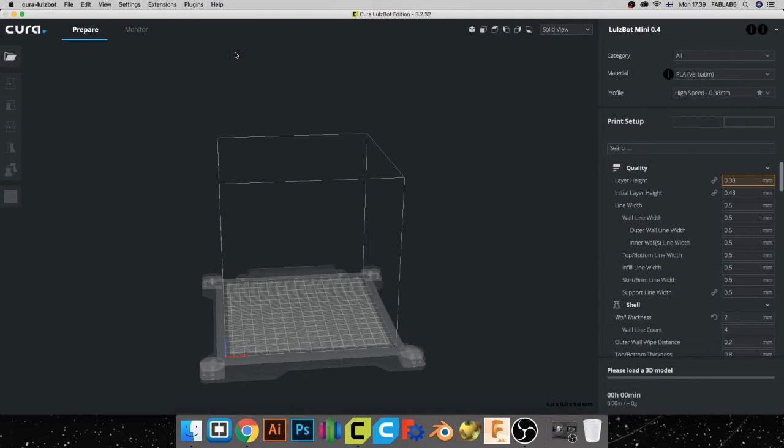And then you can load your files. So you go to File, Open Files, and you go to Desktop, Parametric Balljoint, like so. Can we do one print at a time? We can, but then you have to export them separately.

So okay, now we have a file where these two parts are not connected. So I'm going to clear this, and go to File, Open Files again. This time I'm just going to choose this one. Okay, so here we go.

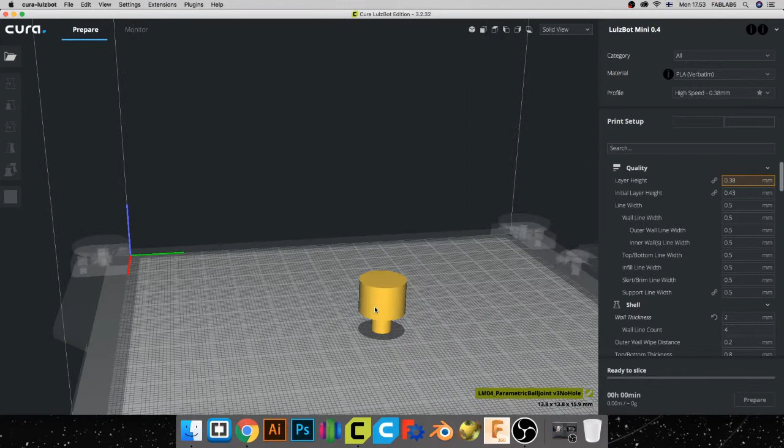So what we would like to probably do is avoid supports. In order to avoid them completely, if you print it from the other side, then you would not need the supports. You won't need it.

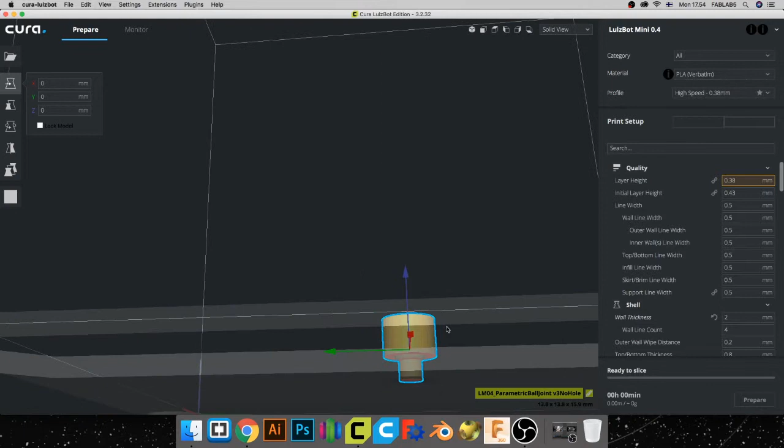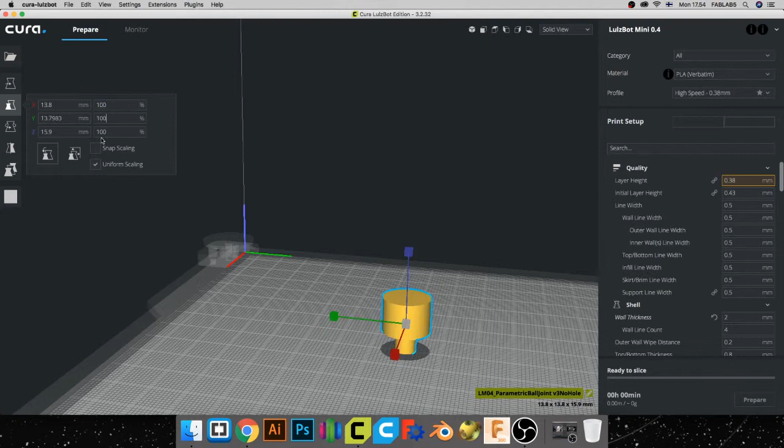So here in Cura you can do all kinds of modifications. If you want to tweak it — let's say you print something and it shrinks, and you want to try to scale it up in a proportional way, you can do it here. You can specify percent and all of that. And in this case we need to rotate, so you can do that as well.

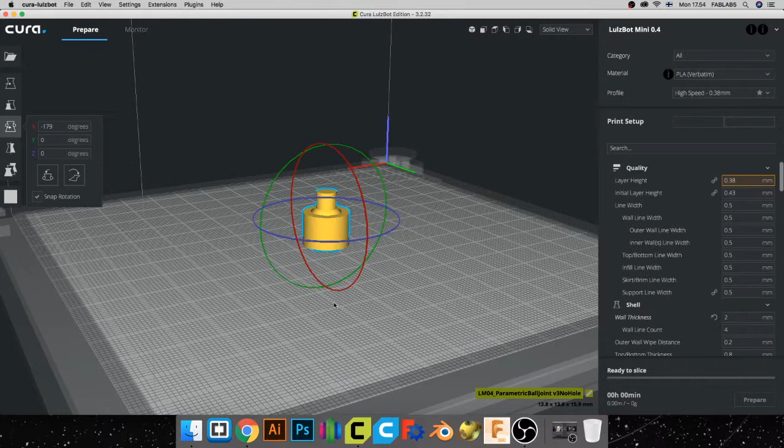But I mean, we can rotate it 180. No, according to the instructions, that's going to fit the ball. Ah, okay, so the midpoint has to be at the top, which is why it's down here. Okay, then it makes sense.

Okay, then we'll probably make supports on the bottom. So, just in case you need to do something with the model, you can use these tools on the left in order to do that.

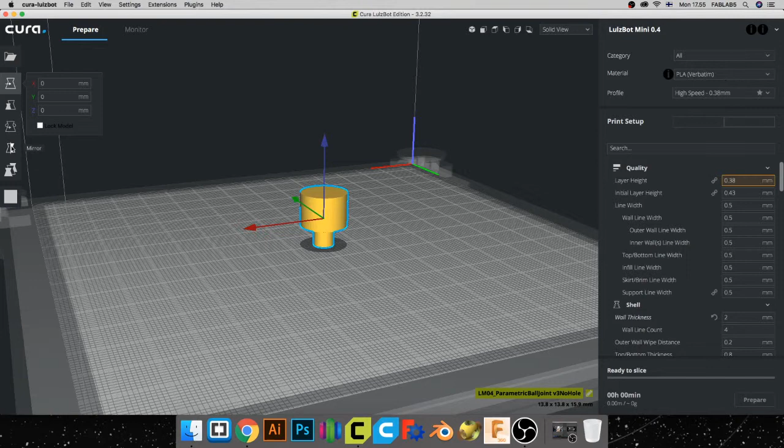Then sometimes you might also need to multiply the selected model. Let's say that we want to create 2 copies of it — it's going to create those and automatically also align them. But in this case, we just need 1 for testing. It's usually also a better idea to print just one object to test your settings and the model, than to print 10 of the same kind at the same time.

First of all, you don't know whether it's going to work if you're doing it the first time, and second, it's going to take a lot of time — and the longer it takes, the more possibilities for it to fail.

Here we basically just need a few settings, but I'm going to leave this all anyway. For material, select PLA — pretty much any PLA setting is going to work because PLA is PLA. Then we can select the profile, and I would recommend going with standard, and it works really 90% of the cases. I haven't measured it really in percent, but in 90% of cases this is really what you need, and it's also going to make it so that your print is less likely to fail.

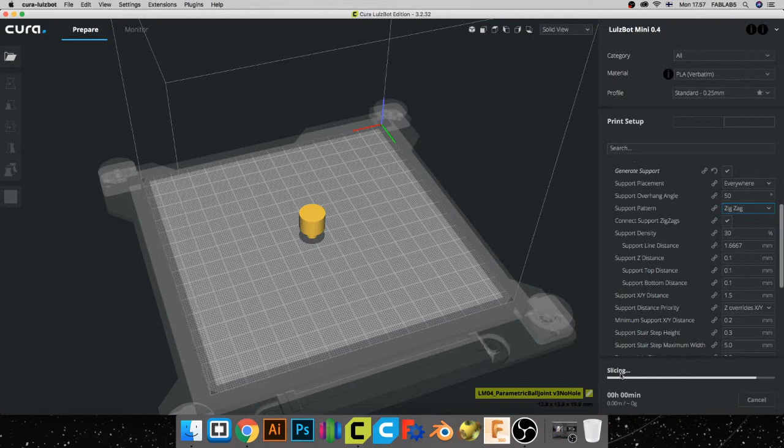Before saving it, we can go to layer view over here to check how it is going to print. So we can zoom in here. Yeah, so it looks okay.

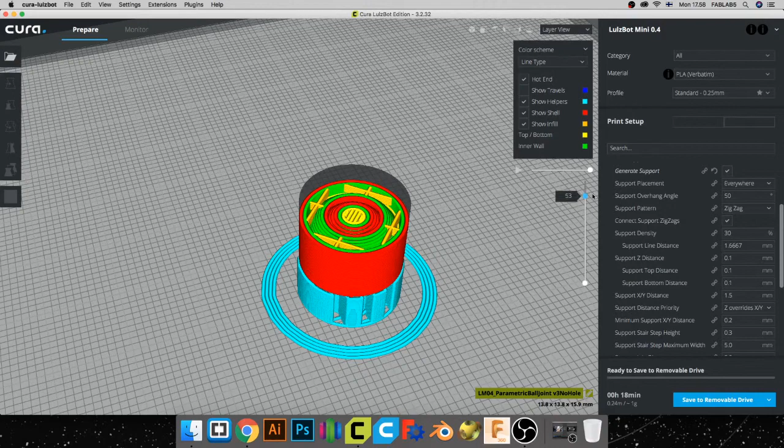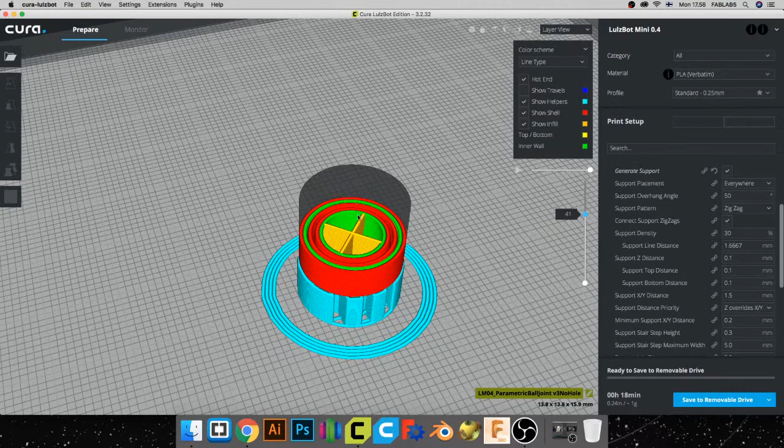Whoop. Moved it. Okay, let's prepare it one more time.

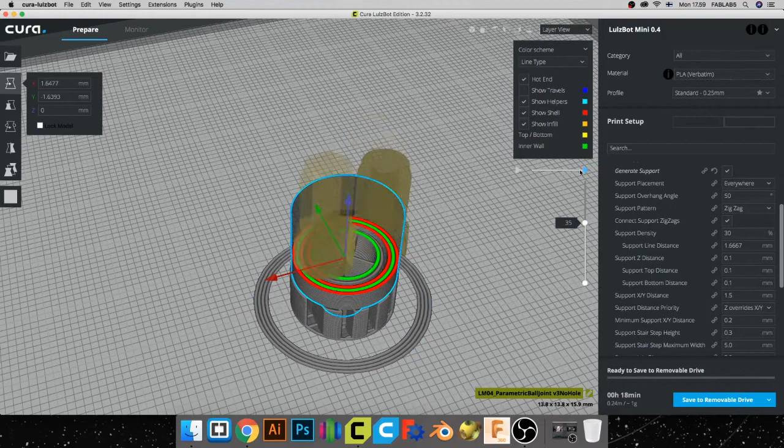So here you can go to any of the layers, and with this slider you can see how each of these individual layers is going to be printed.

And then from here you would save to file, so select the save to file option and then click save to file, and let's create a new folder, and let's save it here.

So it's gonna save it automatically with the LM04 prefix, which is the LulzBot Mini 0.4. It's gonna automatically generate a prefix from this title, just so you know which printer should be used for printing this file. And it's gonna save it as G-code.

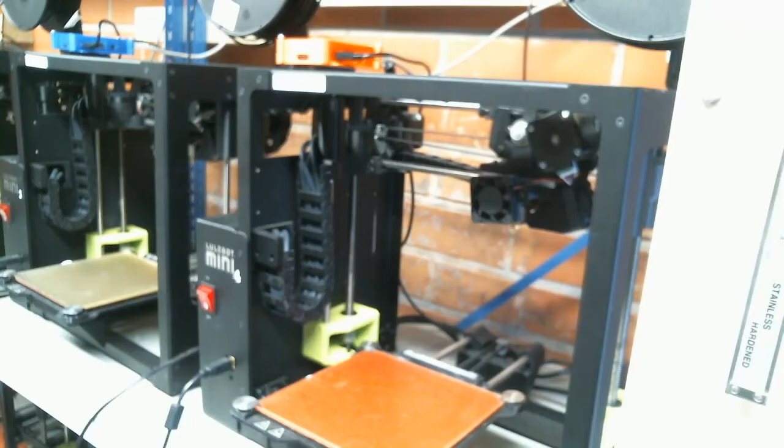Save. So there's a Raspberry Pi here, serving a web interface. This Raspberry Pi is in between your browser, which we're going to use to access the printer, and the printer. The printer is connected to the box, to the Raspberry Pi, with a USB cable, and in order for the Raspberry Pi to access the printer, we need to switch the printer on, obviously.

Now it's on, and so when it's on, we can open the browser, and usually you have these links here in the bookmark bar. Basically what you need to use is the 3D printers link, which is going to bring you to the fablab.aalto.fi/3D printers page, and this works only locally.

So when the printers are not accessible, these little circles are red, and you need to know the number of the printer. In this case, it's the LulzBot Mini 4. Then you can click on it, and it's going to try to automatically log you in. If not, try to use the presets over here, and if you don't know the password, or if it doesn't automatically fill in the password here at the lab, ask someone around, they should know it.

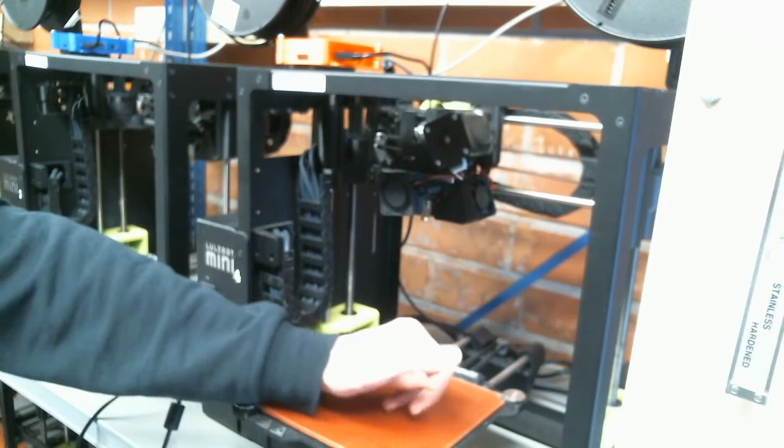The printer is going to start to move. First it's going to heat up the nozzle to 140 degrees in order to clean it and wipe it. You see on the back side of the printer there's this felt thing, and in a few seconds you'll see what it's going to do with it.

I think it actually does two functions with this. First, it cleans the nozzle from any leftover plastic. Second, it's trying to figure out the transformation matrix that has to be applied on top of every line of G-code, so to level it out better.

So now it's going to wait until it heats up to 200 degrees and start printing.

It's always a good idea to watch until it finishes the first layer, to make sure it's okay. Usually if the first layer is fine, the rest of the print is also fine.

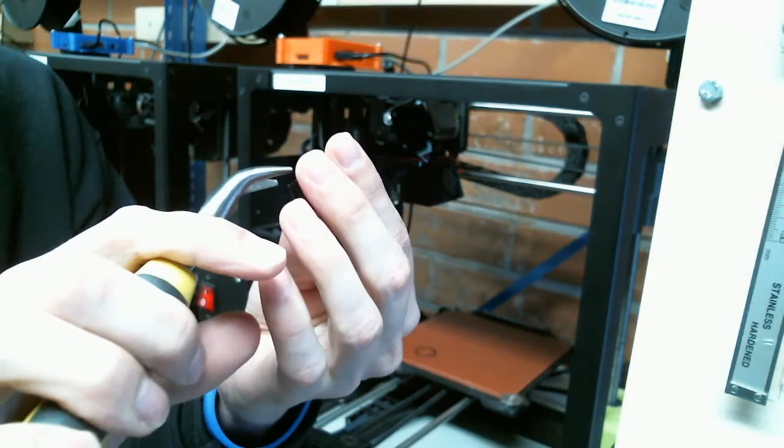But if it doesn't come off so easily, then use smaller pliers like these. Let's see... yeah, okay, so here, that was easy.

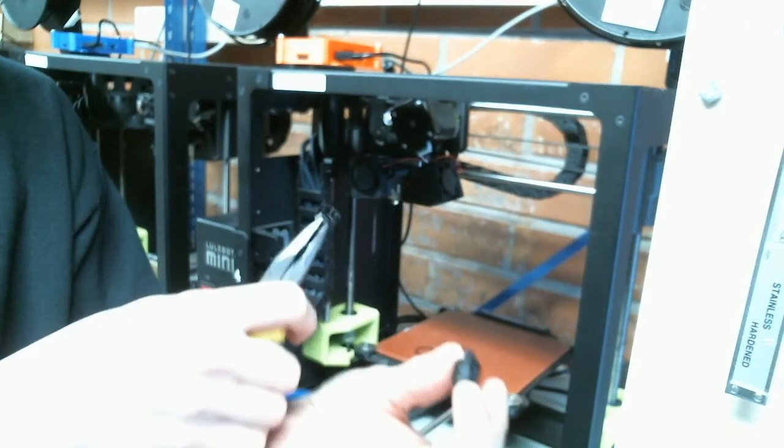And then you probably want to see whether this is going to move or not, right? Yeah, and it does. Oh, that's nice.

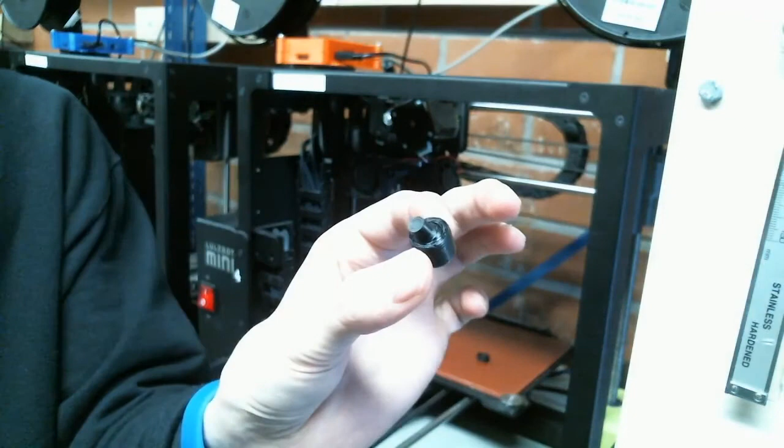So the next challenge is to print this with another color. I wanted to cover the filament changing process too — check it out. So next up is covering the filament changing process.

Here you can see a filament roll, this one over here. For this print we were using black filament, but let's go with something else, like green — or we have white. Since you have a black one, maybe we can try a white one, so we have a nice black and white situation going on there.

It's like this but has a hole in the top — it's the other 3D model. Okay, we can print that with white, so we're going to use this one, the white filament. In order to load it, we have to unload the other one first.

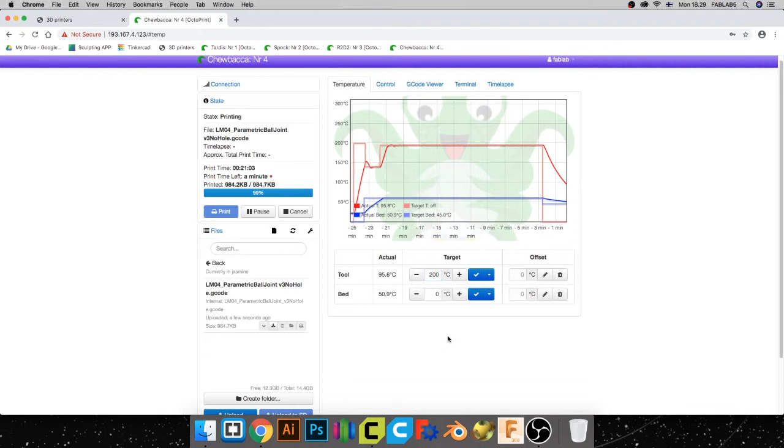Go to the web interface, and we need to heat up the nozzle to 200 degrees, which is the melting point of PLA, and hit this button over here. So now the target temperature is going to jump up to 200. No, so it did not — here, like this.

Why it does not work? It still says that it's printing, so it was cooling down actually.

And then the actual print finishes when the model is being pushed out, like presented to you or handed out, as on a plate, like you just saw with this one. So usually Octoprint is going to consider that your print is done, so these two buttons also are going to go off.

So now we can set the temperature to 200. Okay, so you see this lighter red line here in the graph. It's going to jump up to the level of 200 degrees.

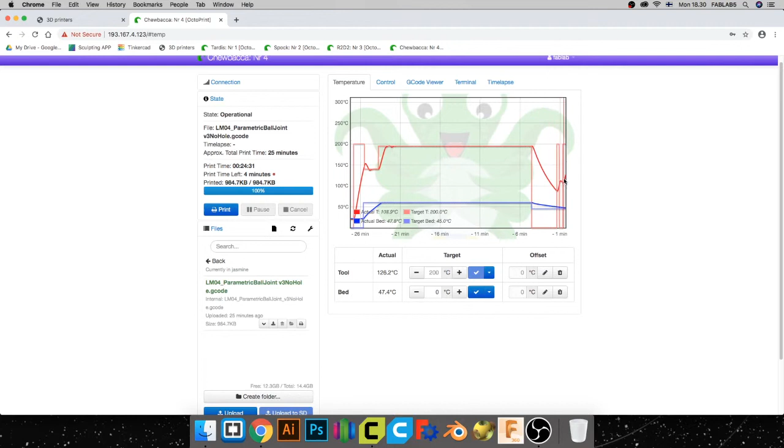And the line that is a bit more fat represents the actual temperature of the nozzle, and as you see it's slowly rising. The blue line represents the temperature of the bed, and the lighter blue line represents the target temperature, and the fat blue line represents the actual temperature of the heated bed of the printer. So now you see it's really quickly rising.

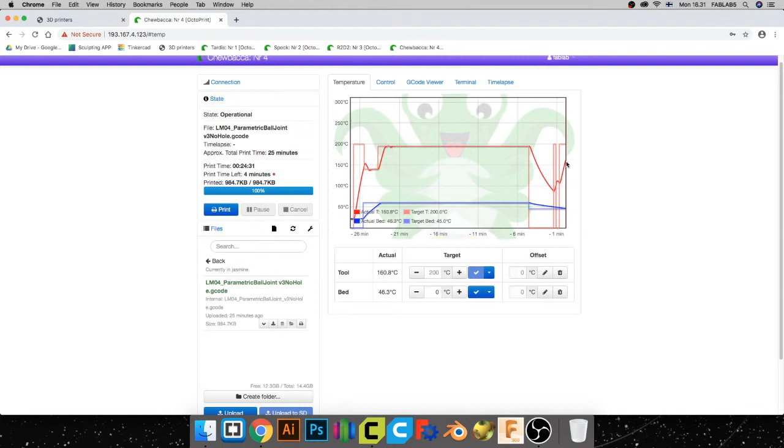Okay, now it's good enough, and I can go to the control tab. And I'm going to retract the filament for like by 100 millimeters. And now I hit retract, and then let's put it here. Oh, no.

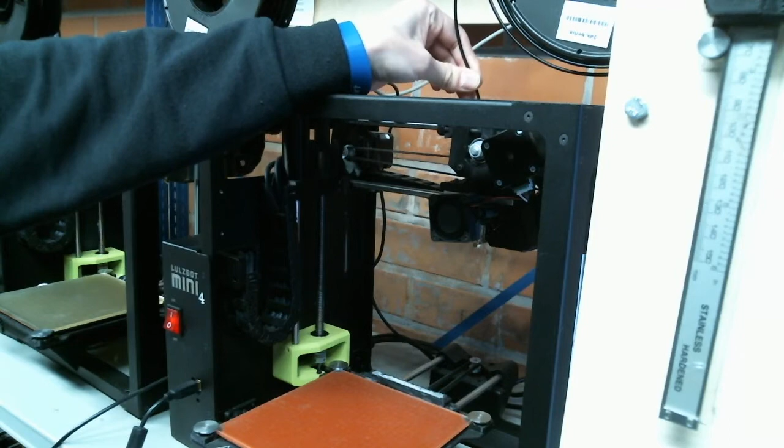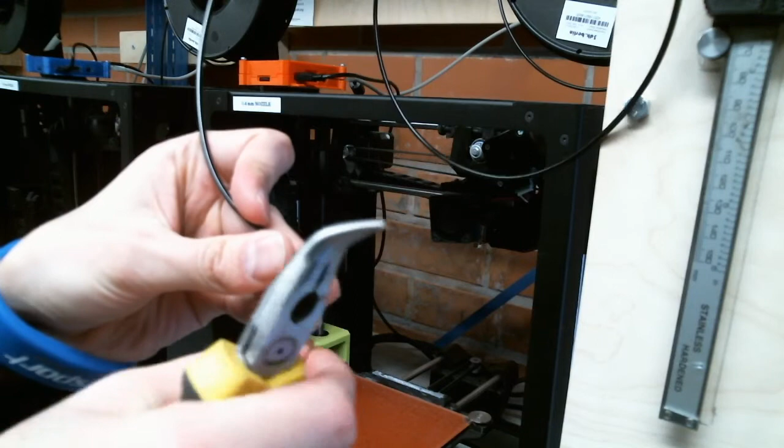See, this starts to spin and the filament starts to come out. You can help it with your hands a little bit. And then once it's out, snap the end, which is a bit molten, and remove the filament roll.

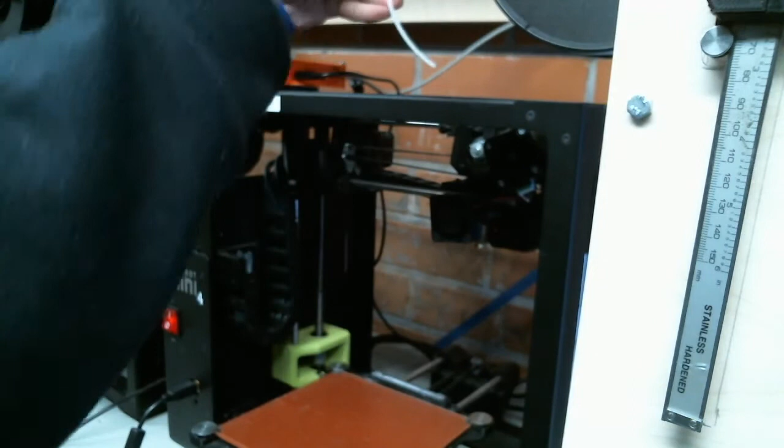Make sure that you fasten the end of the filament. You can insert the end of the filament in one of these holes over here and put it back in the bag. And to load, unpack the other filament. So this is milky white color. And then you have to insert it here in this hole.

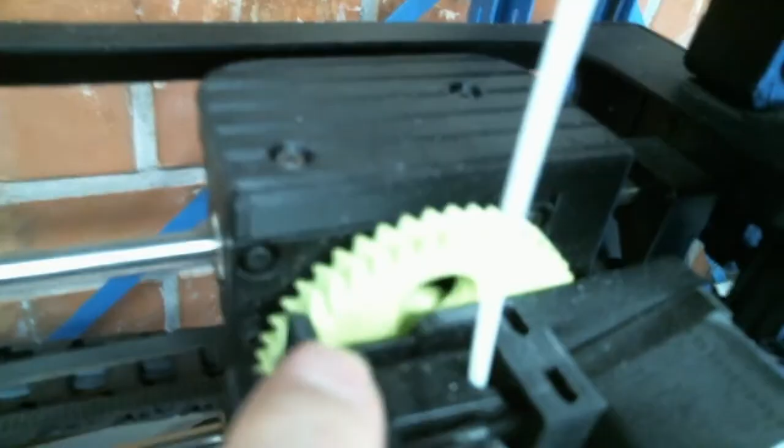So in order to load, there's this mechanism over here, and you can use this in order to loosen the little gear. There's a little gear that is pulling the filament inside, and you can release the pressure. So there's a little gear and a little wheel, and the filament is going in between them.

And in order to push it in, you can release this and then push it in. You can go 150 millimeters forward. You hit extrude, it's going to start to move, and start to pull the filament in. Yeah, so it's pulling in.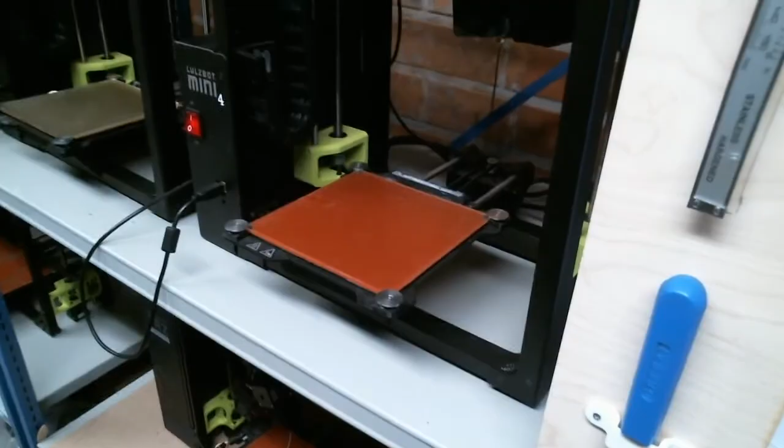And the next thing is that we have to wait until the filament is going to start to extrude. So you see here, white filament starts to come out of the nozzle, and then this was it. So this was 150 millimeters. And now we can start printing.

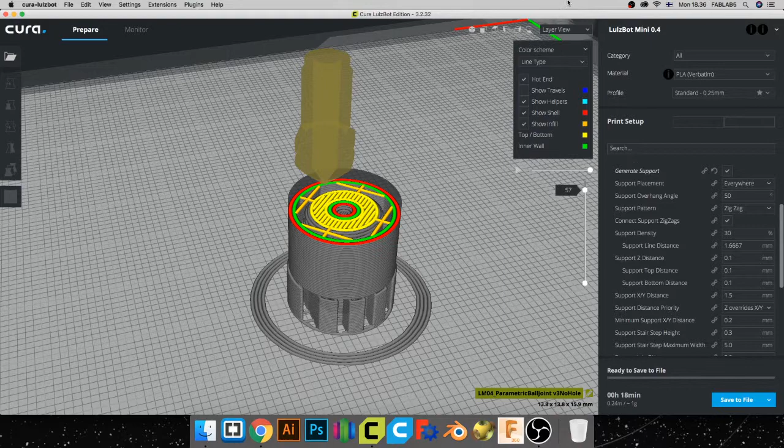Let's go back to Cura. And let's select the solid view, zoom out, delete this one, go to File, Open, parametric with a hole, hit Open. And we do not need to change any settings here, because this is all saved from the previous model. And we can hit Prepare.

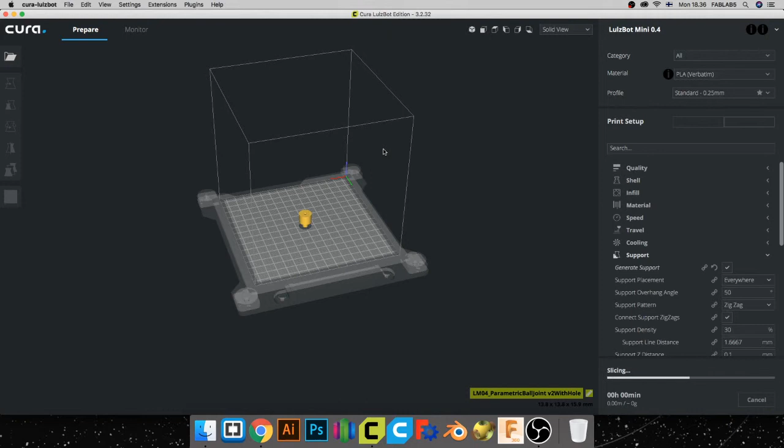And we can check out the layer view to make sure that everything is fine here. Yep, it looks like it. And then we can save it to file in the Jasmine folder on the desktop. So now back to the browser,

and here upload. Select the correct file. And hit print.

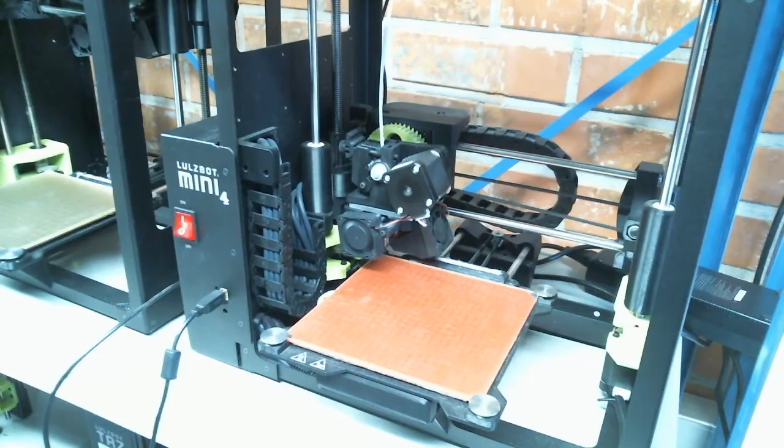Yeah, so now it's gonna print the white one. Oh, so it's with the hole, right? Yeah, okay, that sounds riskier.

That's usually the 3D printer test, so they have these warped vase structures. That's a good way how to test how precise the printer is. So if layer shifting doesn't happen on the upper layers, then it's kind of fine. But sometimes if it's really thin and tall, then it starts to wiggle, like on the top part.

Yeah, because the nozzle is also touching a little bit the top layer, right, and then it pulls it there and back, and it starts to shake. Yeah, that's not very good.

So, should be ready in a minute.

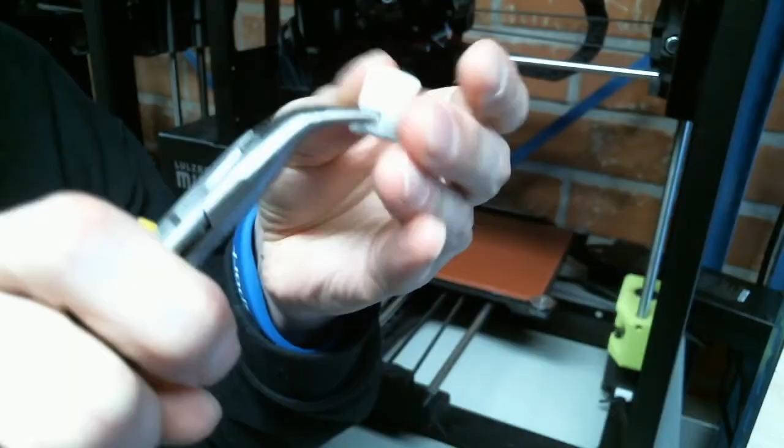So usually you would wait till the build plate cools down, but for objects this small you can just go in and just grab it. Yeah, it's come off quite nicely.

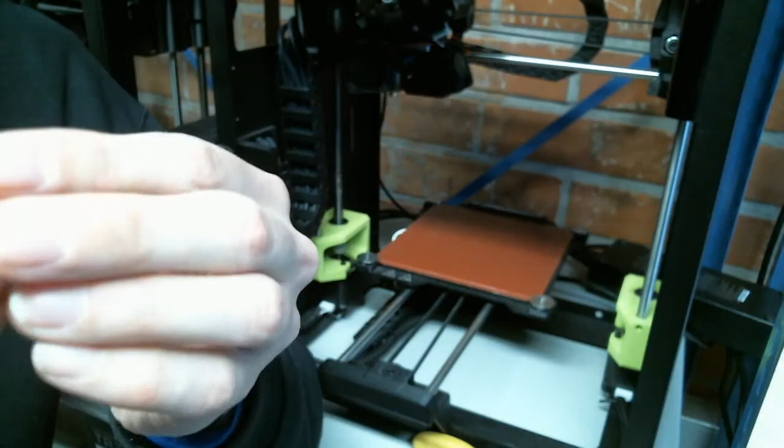Now I think that there's this first move that just breaks it, and then it moves. Oh, this one also works. Nice, you can, okay, and that's it. And don't forget to switch off your printer.